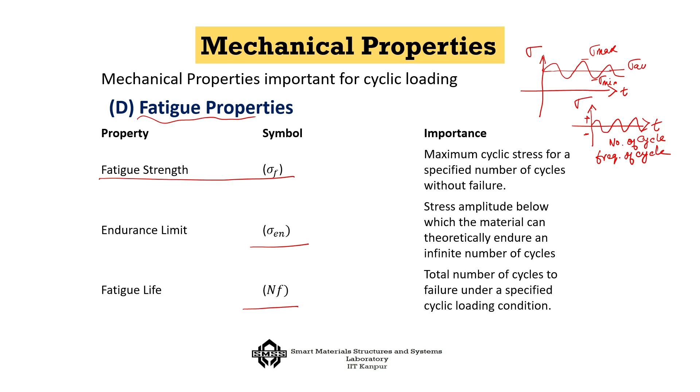Everywhere when defining fatigue, the number of cycles is important, and also the frequency of cycle — both play an important role. The fatigue life is defined by the parameter Nf, the total number of cycles to failure under a specified cyclic loading condition.

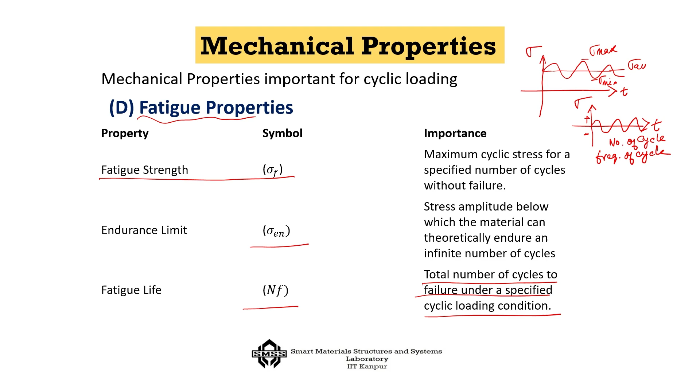Let us look into fatigue in more detail. How do we define fatigue? Fatigue is the progressive initiation and propagation of cracks caused by cyclic or fluctuating stresses.

We are not just interested that the material is undergoing cyclic stress — until there is a chance that cracks form in the material, which gain energy because of the fatigue cycle, and then the cracks start to propagate and failure happens. So fatigue is inherently related to the possibility of fracture.

A fatigue failure generally has 3 stages: crack initiation at a stress concentrator, such as a surface scratch, a notch, inclusion, or weld defect; then as cyclic loading continues, the crack propagates; and finally, final fracture occurs when the remaining cross section can no longer sustain the load.

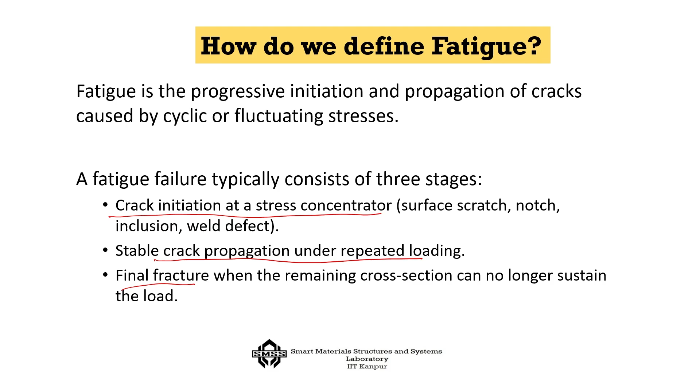Interestingly, a material which is apparently ductile, for example a copper wire sample, if you do continuous repeated cycling, it will break. That means first there is crack initiation, then the crack propagates, and finally it fails like a brittle material. This is a telltale sign of a fatigue failure.

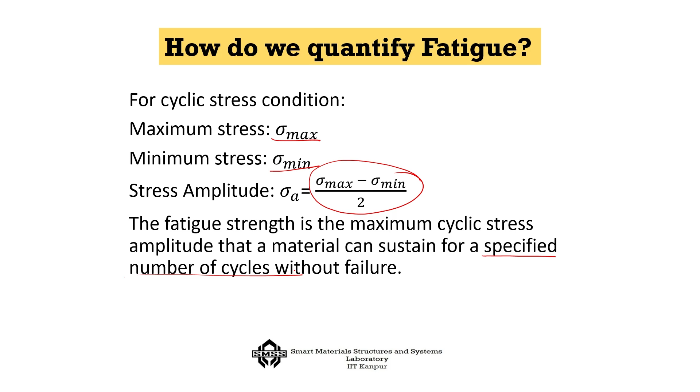How do we quantify fatigue? As shown earlier, maximum stress, minimum stress and stress amplitude — sigma max minus sigma min by 2 — are the first important quantifications of fatigue. The fatigue strength is the maximum cyclic stress amplitude that a material can sustain for a specified number of cycles without failure, so it always has to come with a specified number of cycles.

Every product has a specified number of cycles. This is particularly true for aircraft or any transport system — even a simple bolt will have a number of cycles up to which you can use it, and within that number of cycles, whatever is the maximum cyclic stress amplitude defines the fatigue strength of the material.

The fatigue life NF is the total number of loading cycles that a component can survive before fracture. If fatigue life is 1,000 or 10 cubed cycles (1000 cycles), it has a very short life. If it is 10 to the power 5 cycles, we call it medium life. 10 to the power 6 cycles is long life.

10 to the power 7 to 10 to the power 9 cycles is a very long life, and if it is infinite, we say that it is well within the endurance limit. But of course, the endurance limit is true only for some metals, not for all the metals. You do not get an endurance limit for all the metals.

Now, what is endurance limit? That is another important property against fatigue. It is the maximum stress amplitude below which a material can theoretically withstand an infinite number of cycles without fatigue failure. And it is primarily applied on carbon steels, low alloy steels, and some titanium alloys.

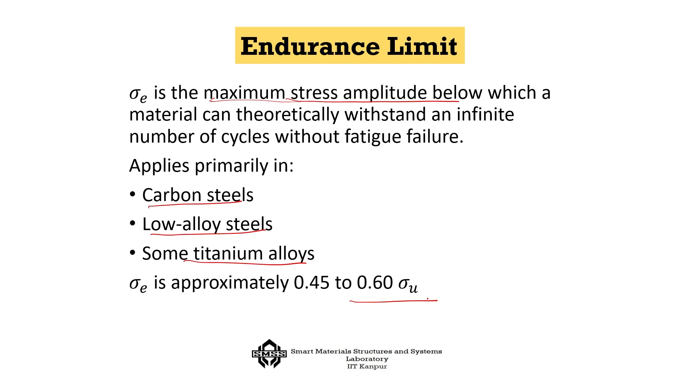We have a thumb rule that we keep this endurance limit as maximum up to 60% of the ultimate tensile strength, so 45 to 60%. So, if your stress amplitude goes above that, then it is not going to sustain infinite number of cycles. It is going to have finite number of cycles, and then depending on the application, you can say whether it is a short life, desirable, medium life, etc.

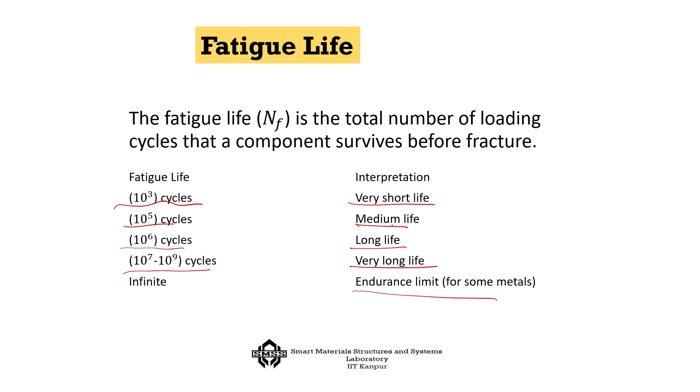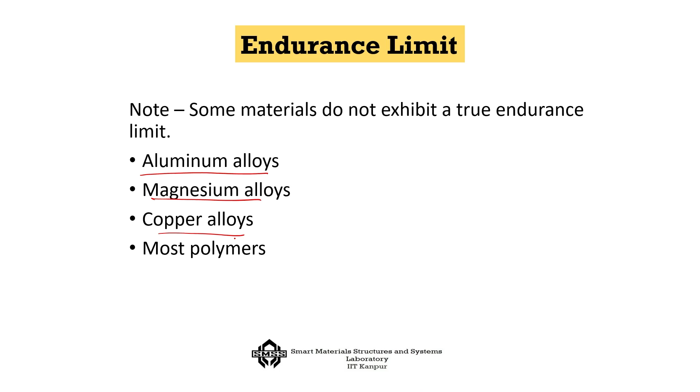Now, some materials do not exhibit a true endurance limit, as I told you - for example, aluminum alloys, magnesium alloys, copper alloys, and the polymers, they do not show a proper endurance limit.

Another few important factors for fatigue are low cycle, high cycle, and very high cycle fatigue. If the fatigue life, NF, is between 100 to 10 to the power 4, we consider this to be low cycle fatigue, which occurs when cyclic stresses exceed the yield strength, producing significant plastic deformation in each cycle. The possibility of such low cycle fatigue is generally observed in turbine blades during startup and shutdown, pressure vessels under thermal cycling, nuclear reactor components, and shape memory alloy actuators.

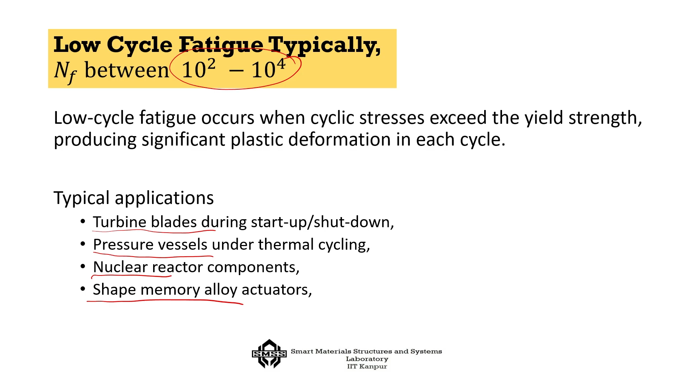So, that is one group of fatigue possibility. The other group is high cycle fatigue. Now, before I talk about it, I want to show you how we determine fatigue strength, endurance limit, etc., with the help of something we call the Wohler curve or SN curve. In the SN curve, on our x-axis we have the number of cycles in log scale, and we plot the fatigue strength on the y-axis.

Now, the endurance limit will be very clear if the SN diagram shows this type of shape that steel shows. But for example, fiber reinforced plastic, you will never see that happening - it is continuously coming down. Even for aluminum, it does not exactly saturate, it continuously comes down. That is why the endurance limit is not very clear for them, but for steel you get a distinct endurance limit. This limit is, as I told you, maximum up to 0.6 of sigma u.

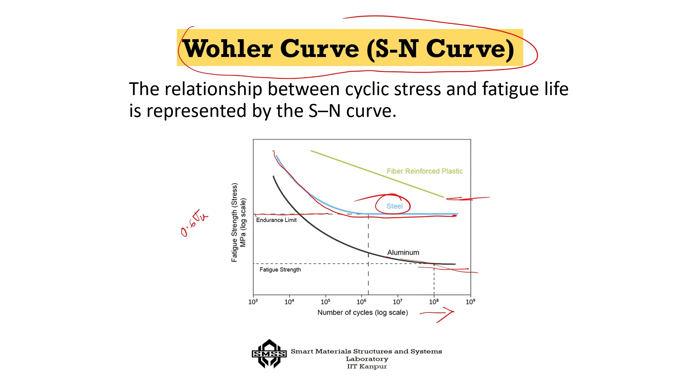So that is how the SN curve - whenever we get a sample that we need to test for fatigue, we actually obtain the SN curve, the total number of cycles that we can withstand, and from that we try to get the endurance limit, etc.

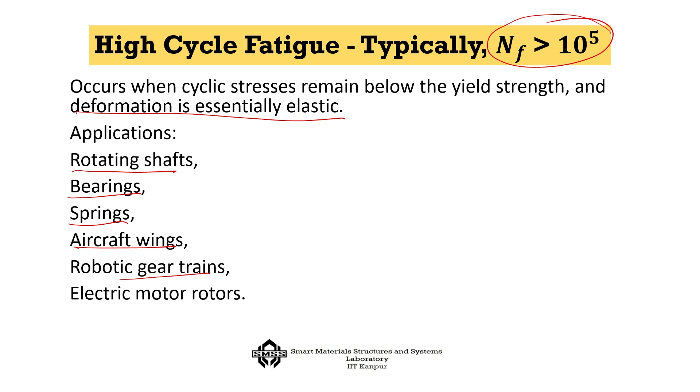Now, I told you about low cycle fatigue, there are applications which are high cycle fatigues - for example, rotating shafts, bearings, springs, aircraft wings, robotic gear trains, or electric motor rotors, etc. They all typically have fatigue cycle greater than 10 to the power 5. In such cases the cyclic stress remains below the yield strength, but the deformation is essentially elastic. So that is the difference between low cycle and high cycle fatigue - low cycle fatigue shows plastic deformation, whereas high cycle fatigue, the deformation is elastic in nature.

Now, you can also have some systems in modern days which are actually very high cycle fatigue systems, meaning NF is greater than 10 to the power 8. Systems like MEMS devices, ultrasonic motors, aerospace actuators, high speed bearings, piezoelectric systems - in all such cases the type of failure that can happen is only in high cycle fatigue, and that happens because of the presence of internal inclusions in them. So generally they are good for a long number of cycles, but ultimately the failure occurs because some inclusions are able to force the crack to propagate.

Now, I will come to another important property. So we have talked about the elasticity related properties, the strength, the fracture, the fatigue. However, you see in many cases, particularly for mechanical system designs, there are always some kind of relative motion between the objects that takes place.

There are always chances of a material being subjected to sudden loading conditions, which can create plastic deformation. So in both cases hardness is an important factor. If your application has repeated contact, sliding, indentation, or abrasion, it is important to check the hardness of the system.

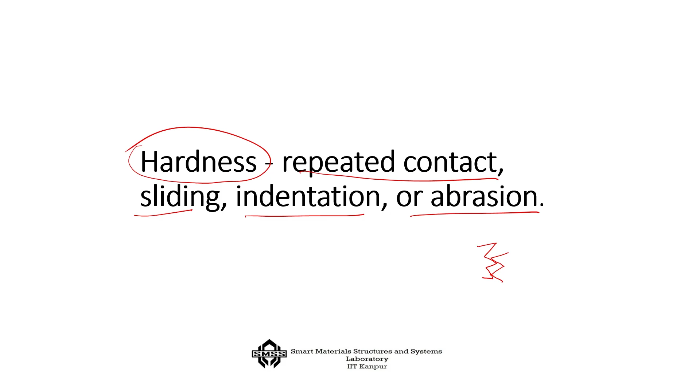Consider, for example, gears meshing with each other. There is repeated contact and non-contact happening. Unless the gear teeth are specially hardened, they will wear, and the load transfer will not take place in the system. Now, the definition of hardness is a measure of a material's resistance to plastic deformation. That is how we define it.

What are the advantages of hardness testing? It is very simple, one of the simplest tests compared to all others. It is simple and inexpensive, and sometimes just a small indentation is good enough, so you can almost consider it a non-destructive way.

Sometimes you can actually get the hardness—this is true for some metallic systems. You can use a relationship known as the Tabor relationship, where you can obtain the tensile strength SU from the hardness data, and vice versa. Generally we get the hardness data, and from that we predict what the tensile strength of the material will be, and that relationship for Brinell hardness is given by this.

Here the x value is n minus 2, and n generally varies between 2 to 2.7, known as the Meyer index. So if you know the value of x, and you have tested the HB, you should be able to predict the tensile strength of the material. That is an advantage on top of just measuring the hardness.

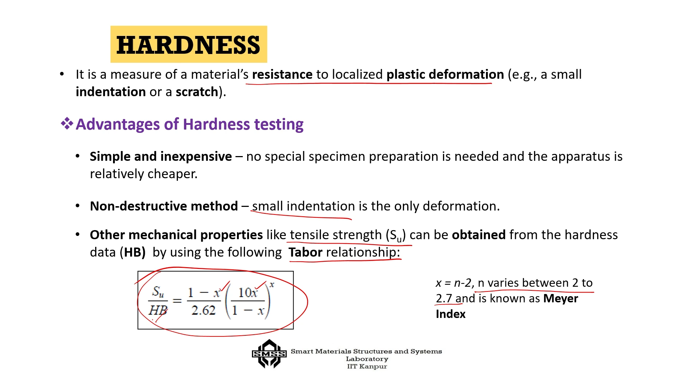How do we quantify hardness? There is a qualitative way people earlier used, called the Mohs scale of hardness, done by scratching a material with another material. Talc is considered the softest one, so gypsum can scratch talc, and gypsum can be scratched by other materials. All materials are harder than talc, and that way all materials can be arranged—talc has the lowest hardness, and the maximum hardness is diamond.

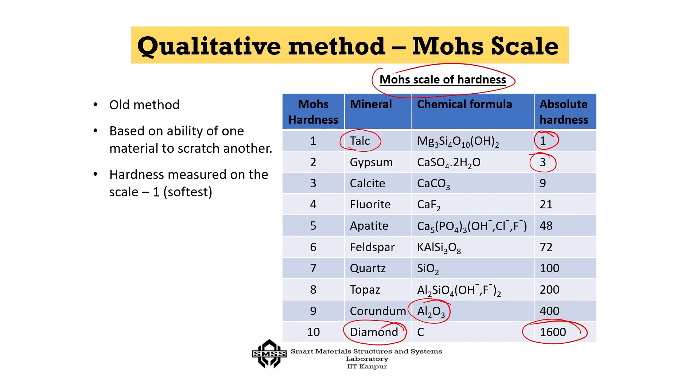That is why diamonds are used as indenters, and next to that is alumina, which is used for different types of cutting tools, etc. There are also quantitative ways, for example macro hardness tests and micro hardness tests. In macro hardness tests we have three: Rockwell hardness, Brinell hardness, and Vickers hardness. In micro hardness, you have Knoop and Vickers micro hardness.

The difference between macro and micro is simply in terms of the diameter of indentation and the load applied. Macro hardness tests are generally done for large samples, where the scale or magnitude the structure is subjected to is large, whereas micro hardness tests are more important for precision engineering applications.

Now, the Rockwell hardness test: a minor load is first applied for good contact, and then a major load is applied, and the depth of indentation is recorded through a dial gauge. The indenter shape is typical—a cone shaped indenter for harder materials, or a small diameter steel ball. So either of them—a minor load followed by a major load, F1 followed by F2—and then you check the level of indentation.

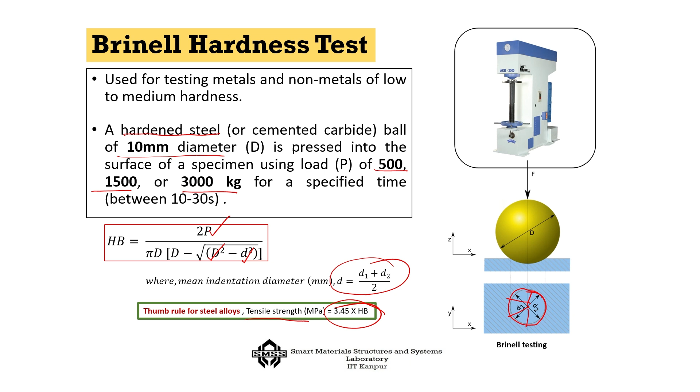Now, the Vickers hardness test is another macro hardness test. Here, we use a square base diamond pyramid instead of a cone or ball, with an angle of 136 degrees between the opposite faces, obtained by applying a load between 1 to 120 kg, and then we calculate the surface area.

Because it is a square base diamond, we need very few measurements to calculate the impression on the system. We calculate the length L, and once we know that and the force, we can calculate the Vickers hardness result. That is the Vickers hardness test.

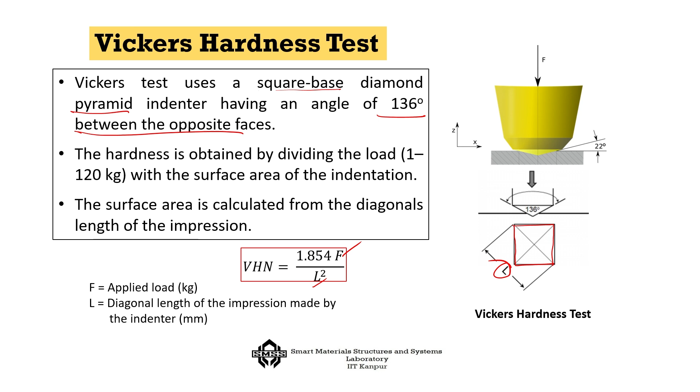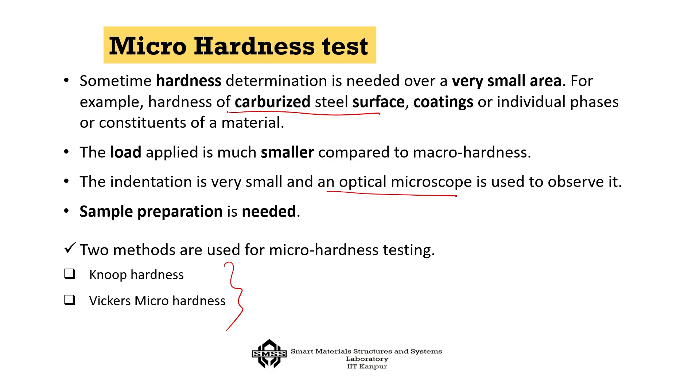There are two types of micro hardness testing: Knoop hardness and Vickers micro hardness. Knoop hardness testing is generally done for very brittle materials or thin sheets. Similar to the macro scale, a pyramidal diamond point is pressed into the polished surface of the test material for a specified dwell time, and the resulting indentation is measured using a microscope. You find the length, and using the formula 14.2 times F divided by L squared, you get the hardness value on the Knoop hardness scale.

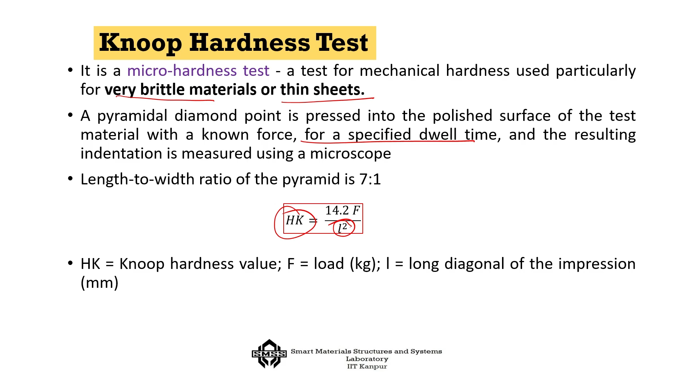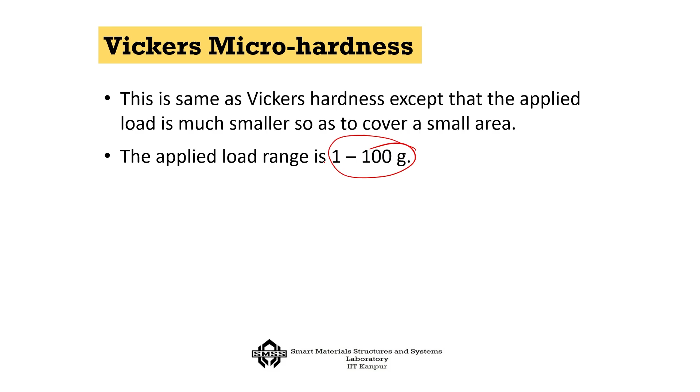That is the Knoop test. Another micro hardness test is the Vickers micro hardness test, done for a much smaller load range, 1 to 100 grams. That is the important difference from the Knoop test.

Now, all of these are actually related to each other. For example, Rockwell C, Rockwell A, and Vickers can each be plotted, and you can transfer one scale to the other.

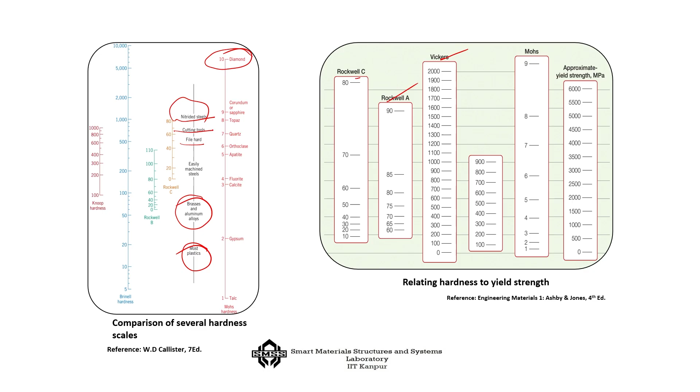You can also visualize where materials fall on a hardness scale. As I told you, diamond has the topmost position, followed by nitrided steel and cutting tools, with aluminum and brass coming even lower, and most plastics appearing at the bottom. So if you need to make tools, you must use the hardest type of material, which is why cutting tools use very hard materials. The next group is easily machinable steels, which have relatively good hardness and thus relatively less wear. Below that are brass and aluminum, with plastics having the least hardness among them.

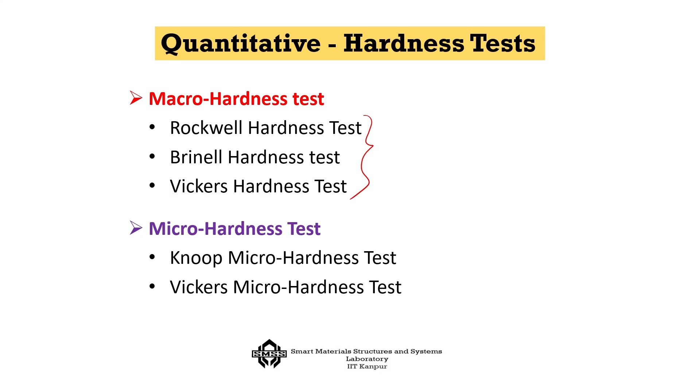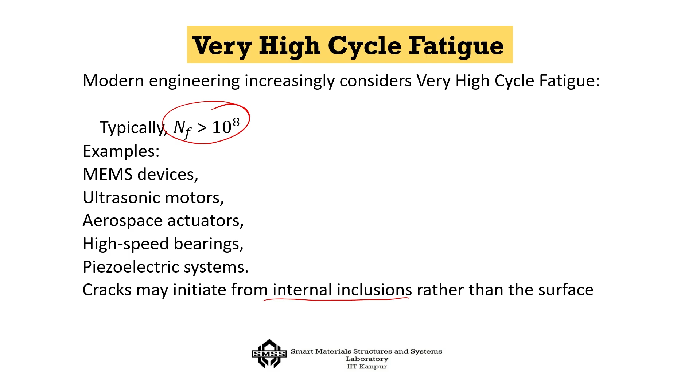So these two properties we've learned today, hardness and fatigue, these are the two things we have discussed in this lecture, and we also know how to select materials from the fatigue and hardness point of view. This creates the basic framework for us in terms of material choice.

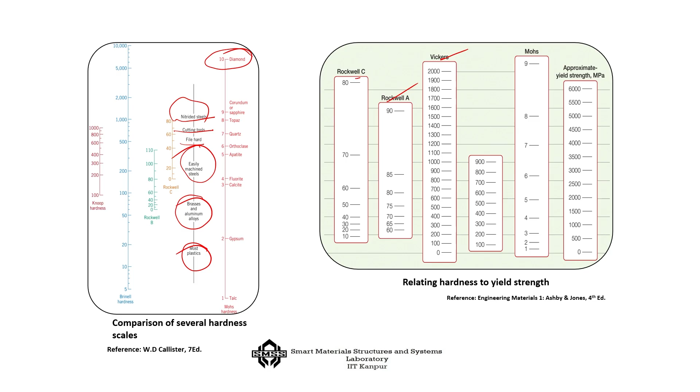We will discuss more material properties in the next lecture. Thank you.